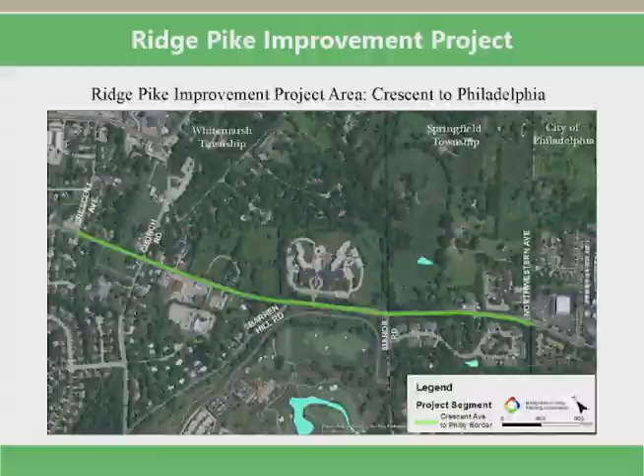This is the map I showed you all last June. It shows the current scope of the project from Crescent to Northwestern. That's going to change a little bit from our conversation tonight. This was the graphic that showed all the different problems that we're going to try to address in this project. We've got key turning movements in a lot of different places, at Crescent, at Barren Hill, certainly at Harts and Church. We've got poor pavement conditions throughout. We've got an alignment that kind of shifts back and forth that makes traffic a little more tricky. There's no drainage really included in this roadway at this point.

Ridge Pike literally goes back to the colonial days when it was a turnpike. It was first paved in the 30s, we think, and some widening was done in the 1970s. So other than that, there hasn't been a whole lot done to upgrade this road for a long time. I won't say since colonial days, but for a long time. And we plan to undo some of that disrepair going forward. And then finally, the one thing that we're committed to also including is a sidewalk so that our pedestrians and transit users have a safe way to get to and from their locations.

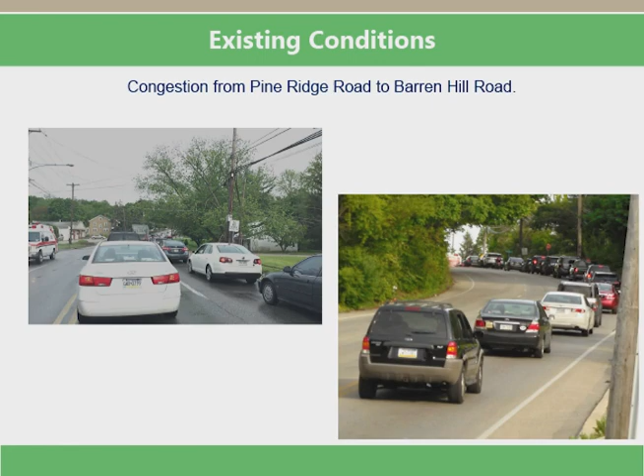Now, I know you don't need any reminders of what conditions are like out there, but these are the slides from last year's presentation. We talked about congestion, where we lose the one lane, it drops down. Two lanes merge to one, more congestion pictures here. Turning movements at Church and Harts are really very difficult; at the least, they're precarious.

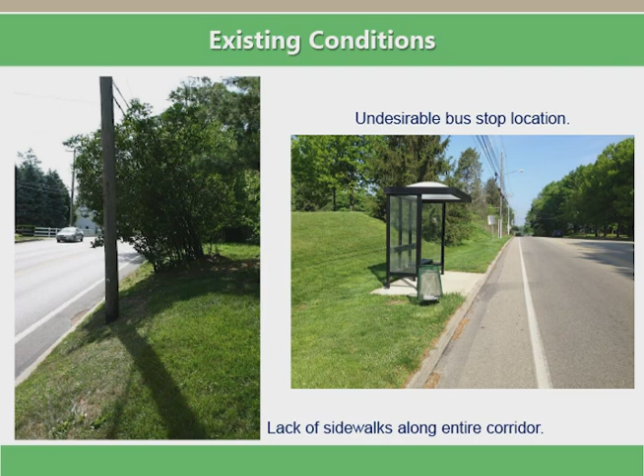And then here again, you can see where there certainly are bus stops, but there's no sidewalk where you can safely get to those bus stops. So those are the types of conditions that we really want to try to address going forward.

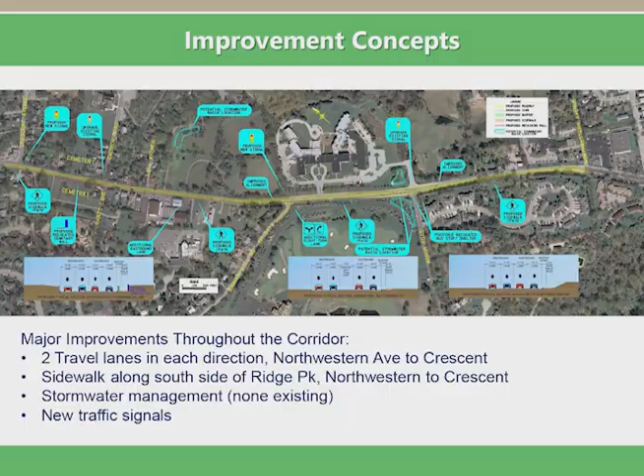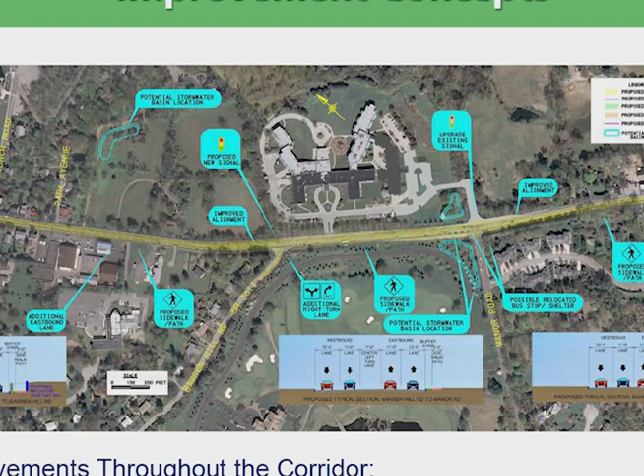We're going to add the sidewalk along the south side, and you can see in those cross sections, those little boxes, you can kind of see where the sidewalk is going to go. We're going to do stormwater management because there's none out there now, and we're going to put in a few new signals, and coordinate the traffic controls along the entire section. So that's where we started last June with our conversation.

A lot of things have happened over the last year. So this is the first, we took that large roll plan and we broke it down into smaller pieces that we could blow up bigger. So that way you could see more detail. These are the slides on the boards around the room that you had a chance to talk to the engineers all about. So we're going to talk a few minutes about each of them.

Down here in the corner, you see the cross section, 4 lanes, 2 in each direction, and the sidewalk on the south side. And you'll probably also notice there's a cemetery on the south side. I think most of you are aware of that.

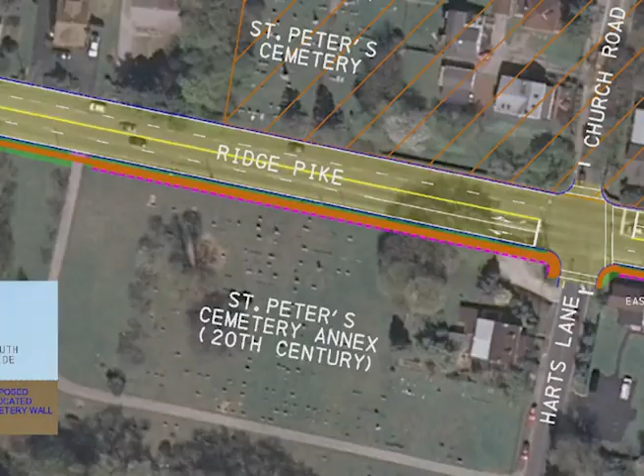We have been in several conversations with St. Peter's Church. Their congregational committee has had a very good talk with us about the potential need to move the wall and possibly relocate some people who are buried there. They have done something similar when they put the addition onto their church, so they're familiar with the process.

They didn't indicate to us that they were averse to working with us to make this happen, and they also have space available on the south side cemetery annex, the 20th century side. So unless a family would choose to move their loved one to a new location completely, we should be able to just relocate people right in the same cemetery, but to a safer place away from the road. We want to talk about that a little bit more in a second.

The main thing I want to talk to you about in this section is you'll notice that our colors don't go all the way to Crescent Avenue. That's because over the last year, we started to have a conversation with the folks at PennDOT. Now this is a 100% county project on a county road, but it parallels the Schuylkill Expressway. And when there's an emergency or an accident or some kind of incident on the expressway, Ridge Pike is the go-to alternative. You've probably all experienced that. When things get backed up, the volumes go through the roof over here.

Those of you who still make this left turn from time to time may feel that you've got a long detour to get around if we would take that left away, but I think most of your neighbors and people in your community are already making that change because it just feels safer to go a little bit further to make the turn. How did that complicate our project? Well, like I said before, this is a 100% county project, 100% county money. We did not gather any of the engineering data needed to add a left turn lane at Crescent Avenue because we weren't planning to do that.

We would have to stop our current process and go collect all that information all the way back to wherever that left turn lane would end, plus the tapers that are required to get you back to the regular roadway. So that would delay our project, extend our project, and increase the cost of our project. So because PennDOT is going to pay mostly for the next section, we'll let them pay for the signal too. So we cut our project at the cemetery. All of Crescent Avenue will become part of that Section F that we looked at in the big map, and that will all get incorporated into the next set of engineering.

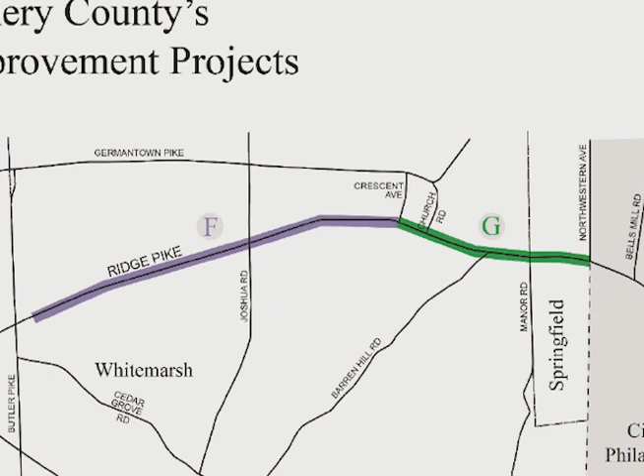Why was it turned to Section F? These are just the letters. So there was an address to that? No. We just started at A and went to G. Oh, I see. You're saying it's now part of Section F. Yeah. Not a Section 4F. No, that's a whole different thing. I was gonna say. No, Section F.

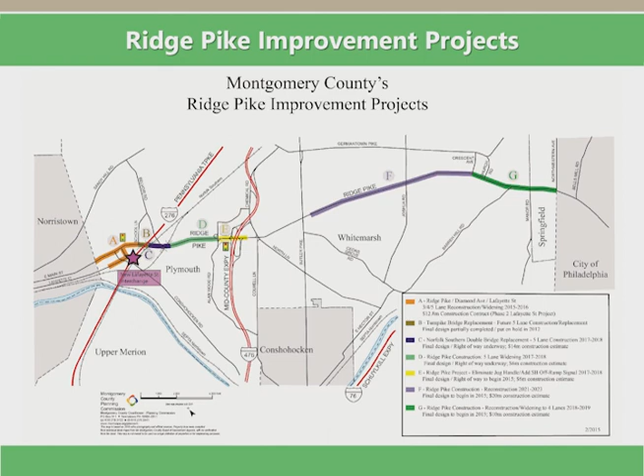Okay, let's get back here. Okay, so just to let you know what we're looking at here a little bit, the orange line is the sidewalk that we plan to install. The green areas are areas of grading, or it's that 3-foot space between the curb line and the sidewalk. We're going to try to put a little green space between the sidewalk and the curb, give pedestrians a little buffer. And the blue lines are the new curb line, the new edge of the roadway. Back to Norristown with you.

Bill Cosby's waiting.

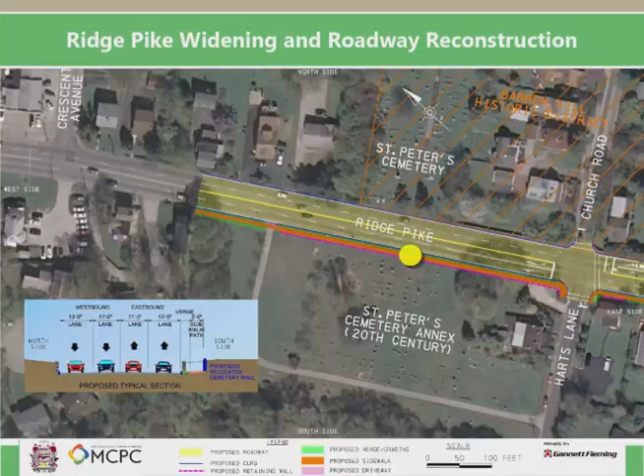My window looks out at the courthouse. I have watched news vans for 2 days. It's kind of crazy. I suspect I'll see a few more.

The blue line is the new curb line. And then this red or pink line here, that's the proposed new wall that we're going to move back to the cemetery. And you see here, this is the existing wall location right up against the curb. No clear zone at all for these cars. So we're going to push that wall back, add a sidewalk, and a new wall.

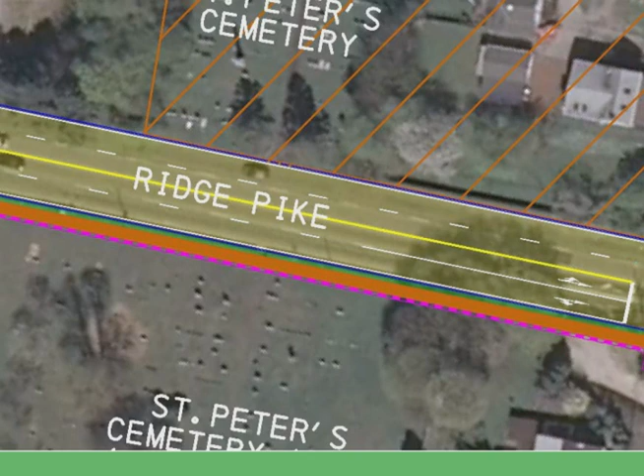We've talked to the church extensively about this operation. We have talked to them about the most efficient way to build this wall to impact as little space into the cemetery as possible. They're on board with that. And you can see here, there's one headstone here. That's the closest one to the road. And then you get into the second row, and the third row, and the fourth.

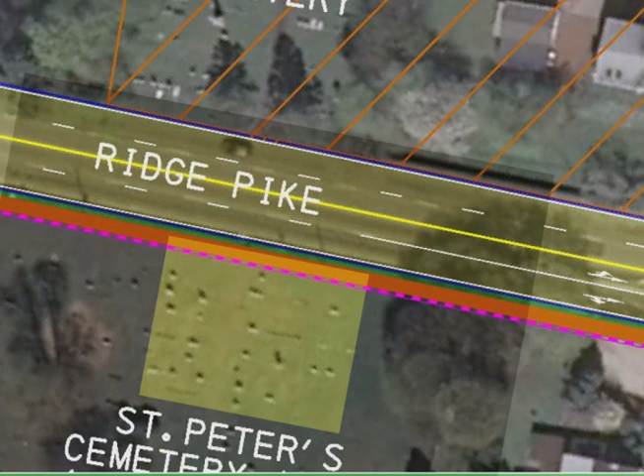We know we're going to have some temporary construction associated with this wall, close to the wall, but we are going to do everything we can to keep it within that first row, maybe two, depending on how they're positioned under the headstones. We do not plan to touch anything else back here. Nothing else beyond what we absolutely have to touch to construct this wall.

Now, there's quite a lengthy process that we are learning about in terms of actually moving an interred person to a new location. We are going to follow that to the letter. We have a solicitor on our staff who's going to keep us in line on that. We're also coordinating with the folks at PennDOT and Federal Highway Administration in terms of what this process needs to be.

We think the process will require us to contact next of kin. Even if it doesn't, it's our plan to try to do that anyway. We don't want anyone to come visit a loved one and find out they're not where they used to be. So we're going to do everything in our power to make sure that this part of the process is as open and as thoughtful of the people who are interred here as we can possibly make it. But there is a process to go through to move people for these types of projects. We'll know more about exactly what we need to do there once we get through the final design.

Before you move on, that intersection where you don't want the left turns, would it be possible to put a sign there restricting them from like 6 a.m. to 6 p.m., like you do no turn on reds? For those of us that use that to make a left. Yeah. You said you weren't going to do that. You changed your mind. So.

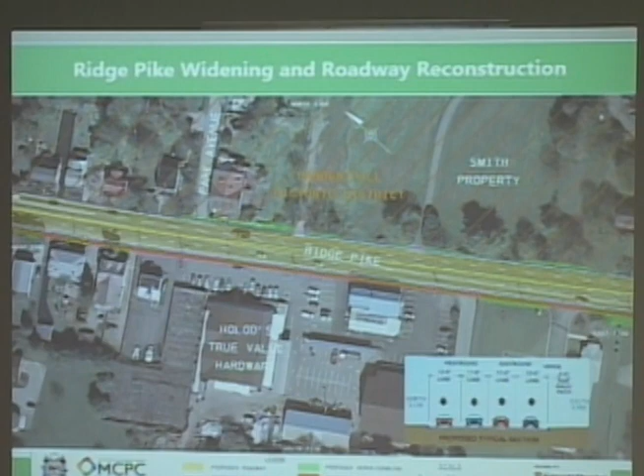Yes, ma'am. Sorry, that's my property right there, Ridge. This one? Is something happening there? We'll need to talk with you more directly. The green areas have to do with where we need to do grading, and I think your property slopes away from the road in front of your house. We're going to have to do some adjustment to your front yard a little bit to make this work.

Is your house the one with the pillars out front? It's that one right there. Right, but do you have the pillars out front? The stone? Yeah. Okay. We're definitely going to need to come talk with you because I think we need to move your pillars. There's no widening of the road there or putting a sidewalk in. No sidewalk on the north side. You can see that the curb line is just a smidge off the existing curb line through here. The old road is about here, the new one's here. We'll talk. You bet.

So moving forward, grading along the Smith property, still just a 4-lane cross section, no center left turn lane or anything like that. As we come up the hill from the Holod's section, we come up to the Barren Hill section. Here's Masonic Village and their driveway. This is where we are doing the most relocation of Ridge Pike. We're pulling it to the north to smooth out this curve, because if you drive out there now, you notice that you kind of do this as you go through that area, which is also one of the reasons people end up in the utility pole over here from time to time. So we'll clean that up a little bit, but that is going to require some grading along this bank on the Smith property, and that's what the green is.

This is the current bus stop here, I think. This is the next section of Ridge Pike. Barren Hill's off this side. This is where the bus stop currently is, I think. And you're right, people walk across the middle of Ridge Pike to get to that bus stop. We are moving the bus stops to Manor Road. So are you trying to get the bus stops close to a light? We want the buses to stop at a traffic signal where the pedestrian can push the pedestrian button and get a pedestrian phase in the signal so they can cross without having to play Frogger between the cars. Because of all the recent deaths at Northwestern, it's a huge issue.

And I can see the need for the sidewalks. But if you're on the north side... I agree with you, sir. Some places there is space to put sidewalk, but then you run into sections where you cannot put sidewalk. And the feeling is you don't want to entice a pedestrian onto a sidewalk that then ends in the middle of a block and forces them to cross the street. It's new thinking, 21st century stuff. So rather than put sidewalks on the north side piecemeal, we are focusing on getting a wide, consistent sidewalk along the south side the entire length.

Does that leave the north side without sidewalks? Yes. There are some places where we could fit in some more pieces, but we can't do a consistent sidewalk on the north from end to end without some serious problems at some locations. Thank you. So this is the Manor Road piece. Yes, John. Speaking of bus stops, you're talking about doing one at Harts Lane and Ridge Pike. Go back a couple slides. Oops, I'm going the wrong way.

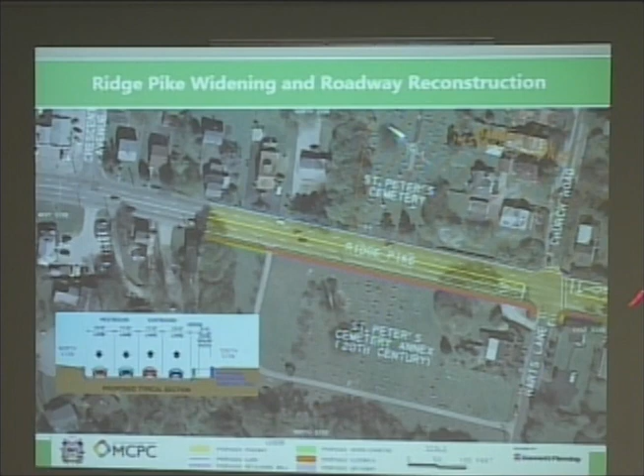Is that still in the thinking? Well, there is a bus stop in that area now, and we would like to put it at the intersection where people can cross with the signal. So yeah, we're still looking at trying to place it here on this corner. Which corner are you thinking about? Well, we were talking about your corner.

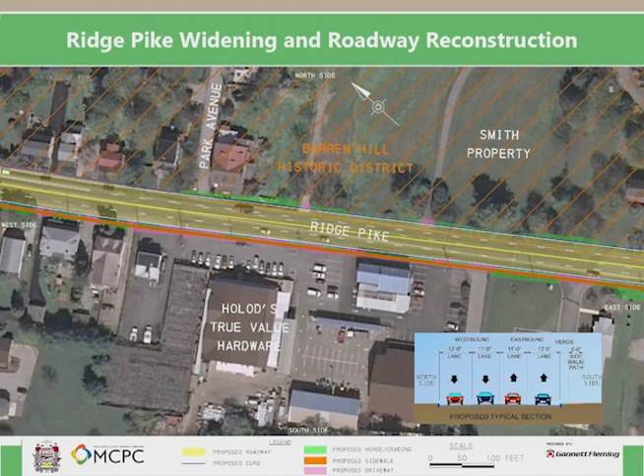The only concern is when people come over that hill, they're not going to see that bus. If we have FedEx or UPS trucks that stop there, not for us, but for neighbors, you can't see them when you come up over the ridge. The other corner, but that's John's corner, not to put it on you, John, but it's only a matter of time until somebody gets rear-ended there.

SEPTA has some very special concerns for bus stops. They like to be after the signal, because then once people are loaded or discharged, they can just go. It's easier for their scheduling. But in this particular case, we might talk to them about trying to do the other side. The bus would have to be far enough advanced that it doesn't stick out into the intersection.

Down further, yeah, which is more of your problem. Which makes it worse, more of a problem than coming over the hill. Right. That's good information to have, and we'll go back to SEPTA and talk to them about that as we go forward. I have a question.

Yes, ma'am. Regarding the signalization at Ridge and Barren Hill, currently the traffic backs up in the evening rush hour all the way to Crescent Ave, and sometimes beyond. What will the signalization of that intersection do to the traffic congestion on Barren Hill at rush hour? What we hope to do is connect all these signals so they act as a group and not stop and go as you get to each signal.

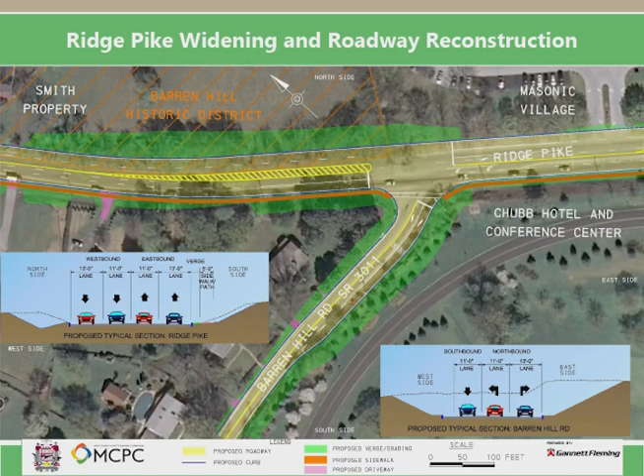So it should be set up so in the morning it progresses in the eastbound direction, in the afternoon in the westbound direction, meaning that if traffic maintains a standard speed, they can generally move through all these signals. We're widening the road so there'll be 2 through lanes. That has a huge impact on the number of cars that can move through this intersection at one time. And we're allowing a lot of the northbound right turns on Barren Hill to continue during the green cycle for Ridge Pike. It should operate better than it does now.

So what do your studies show about the traffic flow with the signals versus as they are now? We're going to talk about that at the end of this a little bit, and I'm going to let our traffic engineer discuss that in more detail. But I'd like to look at the whole corridor together, if you don't mind.

Okay. One detail is that typically when things are backed up at 5:30, there are a number of cars that will make a U-turn on Barren Hill and then go over to Harts Lane to go wherever they have to go. It is a real problem. I would hope that the signals don't compound the issue. It should make it better. It really should make it better. People who are frustrated sitting in traffic do crazy things, and we're trying to minimize that frustration as much as possible.

It's still a roadway that carries 30,000 cars a day. So there's going to be periods when there's congestion, even with these improvements. We can't just eliminate that altogether. It's a very busy road. But it should be way better, lots and lots better. Thank you.

Real quick question. The hatched yellow to the left, to the west, in the middle of the road. Is that a barrier? No, that'll just be paint. That's the gore striping. So you have a left turn lane here, but you have to carry your through lane straight across. Oh, got it. So this is that space in the middle, the taper that I was talking about earlier. You have to get traffic back to their original path.

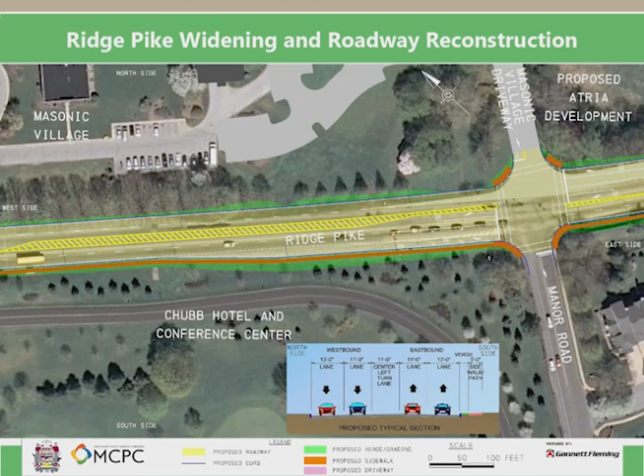And then here we come down to Manor. This section has already been widened considerably. Last year when you were all here, we had lots of conversations about how the signal at Manor was working, and you let us know very clearly that it was not working properly. After that meeting, we coordinated with PennDOT and with Springfield and made some revisions to that signal. I think it's working better now. Once we get all the lane configurations adjusted, then we'll get the final operations of that road.

Is there any grading proposed in this area? The big issue is people running the red light before the hill. Will there be any grading in this area going up towards Northwestern? All this green space is grading. All this is how we tie the road in. I'm talking about the actual road itself. Are we going to change the elevation of the roadway? Not to any major degree, no.

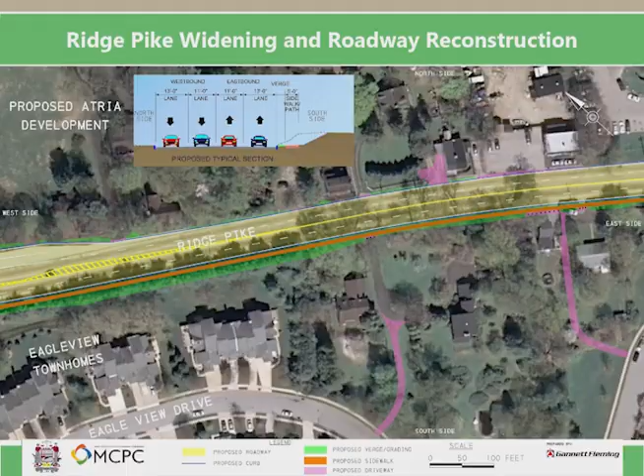So this moves us into the Eagle View section. I have a group of folks here that I call the East of Manor residents. Some of you are in the audience tonight. These folks have a real tough time getting out onto the roadway now because of the way the traffic is. We're going to be adding a second lane in this section, which is going to make it even harder for these folks to get out of their driveways.

So what we are trying to do is speak to the Eagle View Homeowners Association folks about the option of turning these driveways backwards, closing them at Ridge Pike, and having these two folks share one little driveway here, and these two homes share one little driveway somewhere in these vicinities, so that they can come out onto a safe roadway, go to Manor, go to Ridge that way, rather than trying to constantly get out onto Ridge Pike here. And this particular homeowner currently has to back out into Ridge Pike to get out of her driveway.

Excuse me, that's not true. And so we are here, and that may have been an off-the-cuff comment that was made, but I just think it's important that as we're presenting this, these things are not presented as being true, right? So it's true as I know it. I know she has permission to use the loop road of her neighbor. Yeah, she can. Right. So we don't have to have anything in perpetuity from the state to make something for a driveway for the next neighbor.

She is a friend of 25 years. Absolutely. She can use my driveway anytime, and what we have done is take some of the hedge down, and she can turn around and come straight. That's great. That's fabulous. So I thought I'd like to bring that to your attention tonight. Okay. There's never been an accident in that.

25 years. Well, our concern, I know you guys have a relationship worked out and an arrangement. Oh, yeah. Our concern is for when you are no longer there and Ms. Johnson is no longer there, so we should have something formal. Yeah. Okay. I know you guys have it all worked out and you're pals and you don't have a problem with her using it, but someday you may sell, she may not live there anymore, and then there's going to be a whole new relationship to work out. So we'd like to have it formalized.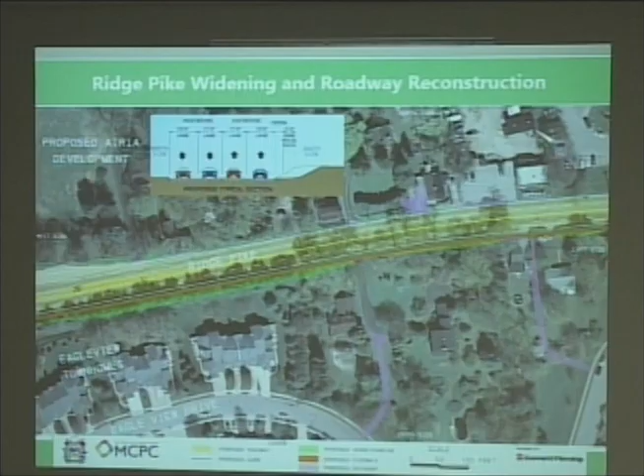So that takes us here to the northwestern section. We spoke a little bit about that. We're going to continue the sidewalk to match up with the Philly sidewalk. The curb line, we actually are going to give the folks on this corner a little extra yard to maintain when it's all said and done.

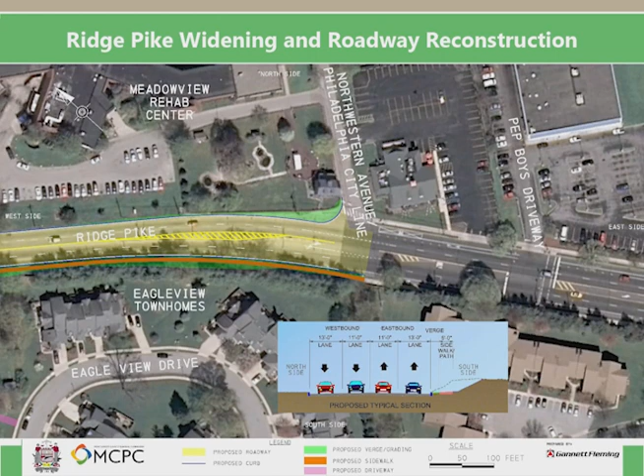This is really wide right here, and it gives the impression to folks driving out of the city that it is super wide as you make the turn. So if we pull the curb in along the edge of the travel lane where it should be, it'll visually and psychologically let folks know that the road's not as wide open as they think. So these folks might get a little extra yard when it's all said and done. Not something that usually happens.

Yes, sir. Yeah, I just wanted to point out that you've got a significant amount of traffic coming off of Northwestern Avenue onto Ridge. You've got at least a dozen homes, you've got Meadowview, and you also have a lot of traffic going down to Fairmount Park. So even now, it's very difficult if you're facing out toward Ridge to make a left-hand turn to go toward the city. And you just mentioned that now with the addition of 2 lanes, it's going to be similar to what they're facing on the other side, where it's going to become more difficult.

Right now, the only salvation is that it's a single lane that starts to merge into 2, and people can keep to the right and leave the left-hand lane open for turns off of Northwestern to come toward the city. So with 2 lanes all the way, that's going to go away, and with all the signalization that you're talking about making things flow more easily, it seems to me that it's going to become impossible to get out of Northwestern Avenue onto Ridge. So my proposal would be that you really need to think about, I know it would be difficult, putting a light there. A traffic signal there.

One question. Sid, did we do counts here? Did do counts there, right? And did we meet any warrants? Counts show that it doesn't meet the warrants. In order to install a traffic signal in Pennsylvania, you have to meet what's called a traffic signal warrant. And there's all different kinds of ones. The most common ones are tied to the volume in the intersection. You have to have enough volume coming out of Northwestern to justify putting in the signal. Right now, we don't have it. Pep Boys was a signal that was put in the city years ago. It would never be approved today. But that's the city. We don't have any say over what they do in the city.

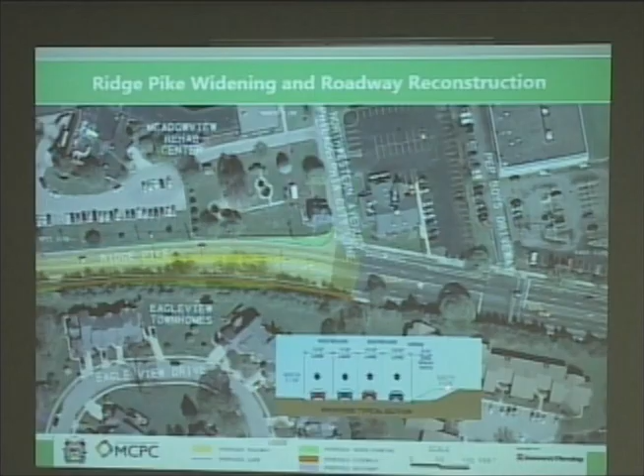Okay. This was supposed to be a short presentation. So here's our schedule. Last year when you were here, we were at this point. Now we're almost at the end of our preliminary design phase. We are going to move into final design here very shortly, and that's going to take us all the way through the end of 2019.

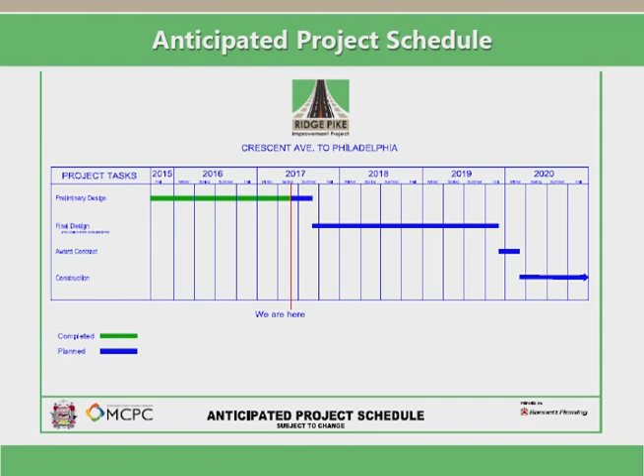At this point out here, towards the end of 2019, that's when we'll be talking to folks about right-of-way acquisitions. So up until that point, we won't have anything to share with you, because we don't want to really talk about right-of-way until we know exactly what it is we need. We don't want to take more than we need. We don't want to come back to you a second time if we need more. So we want to make sure our plans are complete and accurate before we talk to folks about right-of-way.

Then we get our contractor on board, and construction will start in 2020. We're looking at probably close to 3 years total construction time. The bulk of that will likely be in the first 2 years. We have to maintain traffic throughout construction. It would be great if we could just close the road and rebuild it in 6 months and be done, but then you'd never be able to get in and out of your homes for 6 months, so we can't do that. So we have to maintain traffic.

If we get really fair winter weather, the contractors can keep working and move the project forward faster. That has happened recently with the Lafayette Street projects and the Ridge Pike projects at the other end. So we're hopeful that that's the case, but I'm not going to lie to you and tell you it's going to be quick and easy. It's going to be likely 3 years of noise and dirt and aggravation and all that.

Yes, sir? East to west or west to east? That's all going to be decided in the final design phase. In this section, we will have to determine our construction phasing. So there are a couple different ways we can construct the road. We could do all one side end to end, and then flip traffic and do the other side end to end. Or we could do sections back and forth.

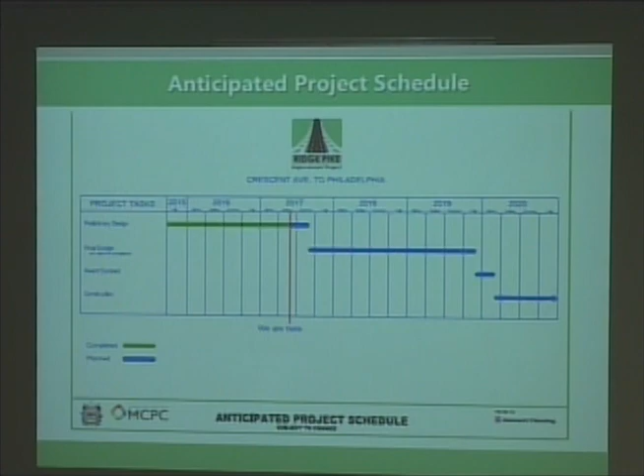I do want to say that sometime in early 2019, I'm going to invite you all back again for another open house. We'll have a lot more of the final details to share with you at that point. And we'll know more about the signal program by then as well. Whether they'll be here with us or not, I can't say, but we should have had several conversations with them by that time. And we'll go forward from there.

Yes, ma'am. Is this construction going to be done during regular daylight hours, or is it going to be done at night, like when they repave the road? That all still has to be worked out. If you would prefer that we work in the evening to keep the construction process shorter, we can wrap that into the contract. That way it shortens the overall construction time, so you're impacted less time, but more daily time. And it sounds like that's not preferred. I need my sleep. Yeah. So it probably would not happen at night. It would be daytime.

Back here. I wonder if it might be possible to work with the city of Philadelphia, big if, to provide access along River Road, along the river, down by the Miquon train station and towards Shawmont, to alleviate some of the inevitable and probably unbearable congestion that's going to occur on Ridge Pike. Because at one point, not long ago, it was possible to get into the city along River Road, and then the residents there complained, and so it's now closed just below the Miquon station.